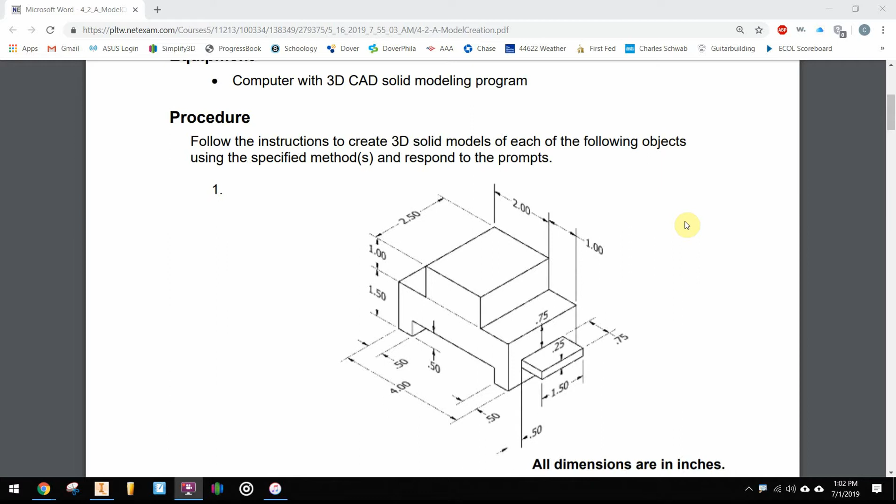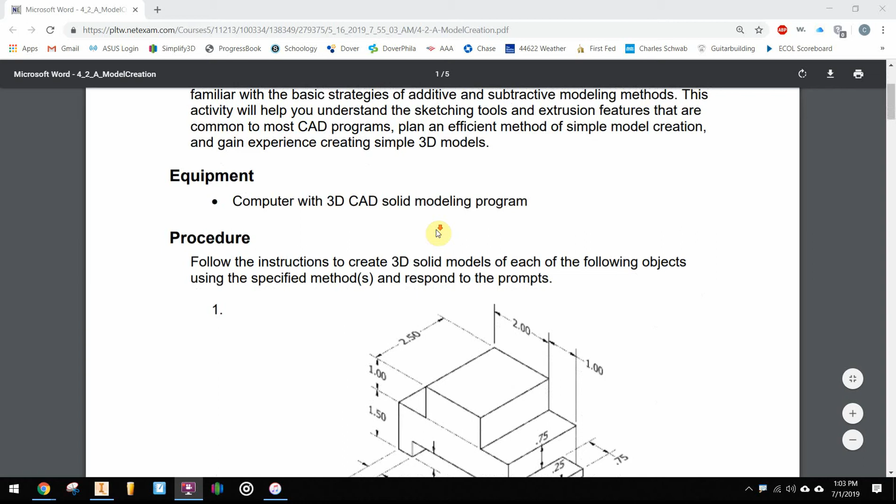The other parts we're supposed to build are what I call widgets. They have no purpose other than being practice parts. You'll often see similar parts in drafting books going back to the turn of the century. I have a book from my grandpa with all kinds of these shapes as standard parts that have been drawn for traditional drafting with straight edge, compass, and machine, all the way through now to computerized drawings. These are all from 4.2A, model creation. They're not very hard, so we'll quickly walk through these, using a combination of additive and subtractive modeling to model these parts.

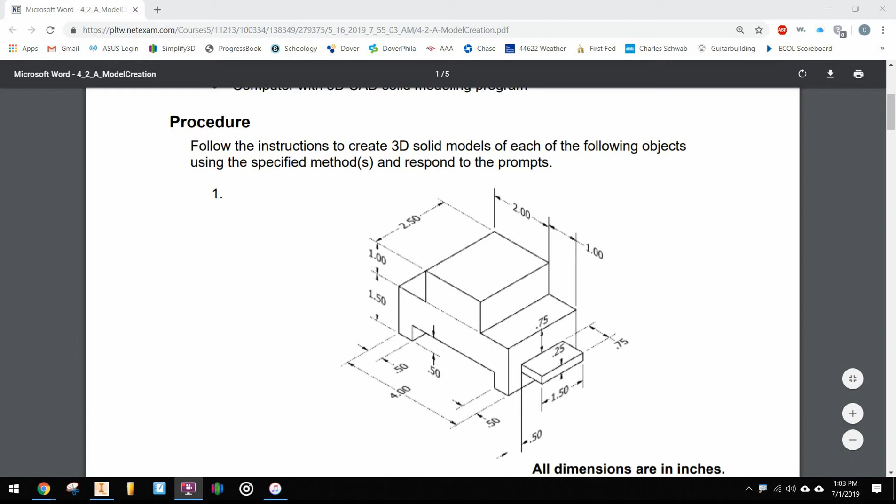Next I've got to start a new part, which I've already done. I'm going to make sure I save this, saving over my part from last year. I just called this widget number 1 from activity 4.2.

Let's start with a sketch on the XY plane using the rectangle tool, making sure I select the origin as my starting point. We have a total width of 4 inches by hitting the tab key, 4 inches by 2.5 inches tall.

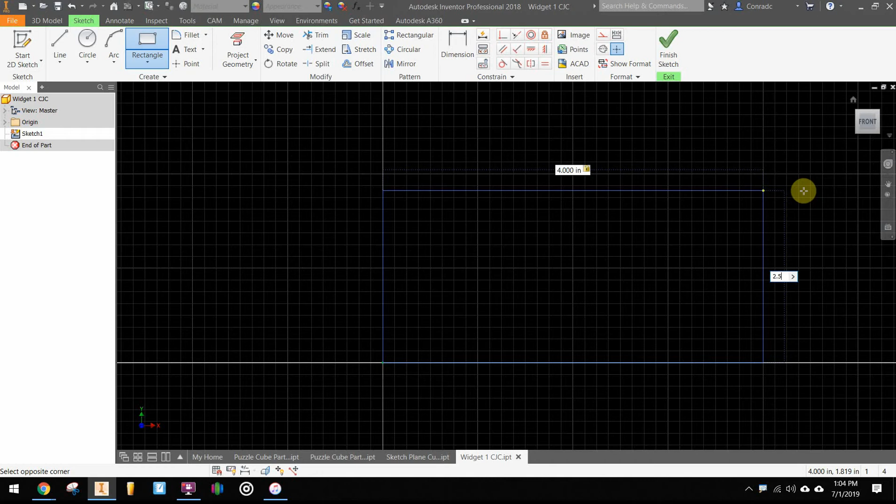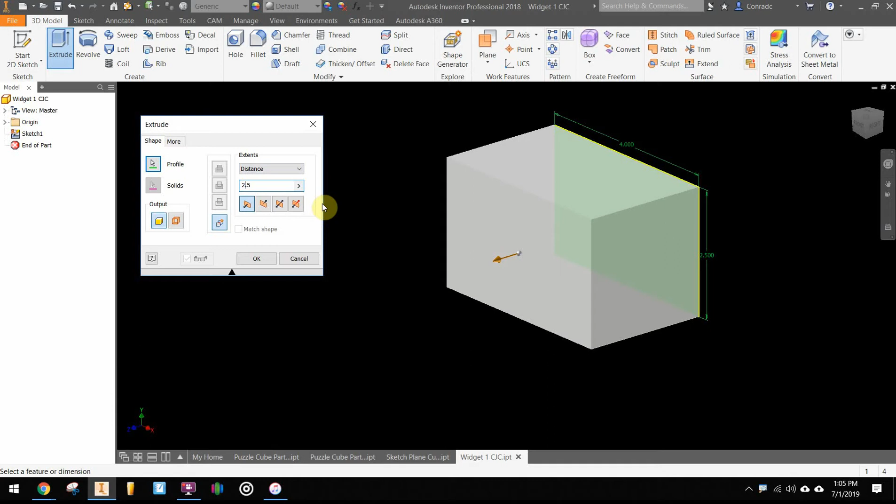We'll go ahead and extrude that a distance of 2.5 inches. And if you have to modify it - my keyboard probably needs new batteries - 2.5 inches there.

So there's the full part, if I was starting from a full block, minus the little tab that's kind of sitting on the side.

So then from that front face, I'm going to go ahead and draw a little square point, or it's actually 1 inch by 1 inch, so that has that square fully constrained. And then let's do another square, 1 inch by 1 inch. And then at the bottom, I'm going to eyeball a rectangle - I'd have to do some math, which Inventor likes math, but I don't want to do the math just yet.

So let's just tab and put in the 1/2 inch height. I'm going to dimension it exactly the way it is on the sheet. So there's a 1/2 inch height, and when I did that, it kind of flipped the rectangle to the bottom. That's no problem, it's not fully constrained yet, so I should be able to drag that around. And no, I can't.

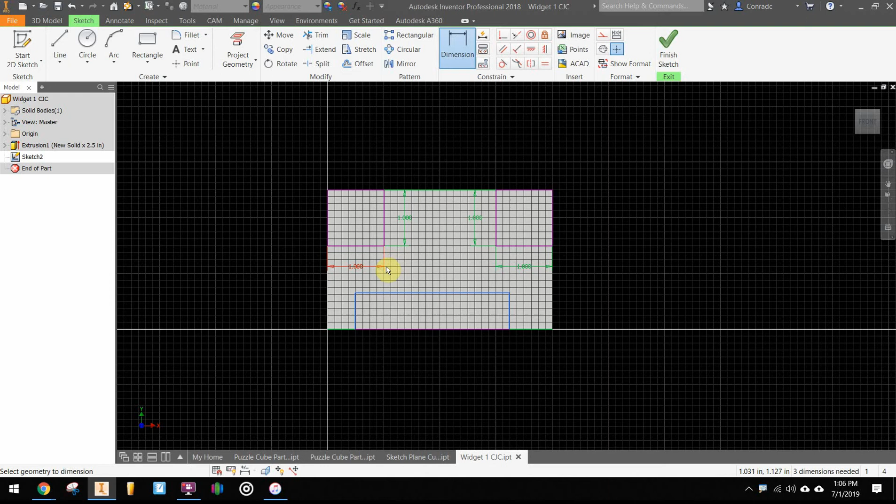So we're going to have to go backwards to go forwards then - sometimes that happens with Inventor. You can't break it, you can always fix things. So let's go ahead and delete that dimension. I'm going to drag this side back up then, and now we'll dimension exactly what we want. We want this side to be 1/2 inch, and we want the distance from each side to be 1/2 inch.

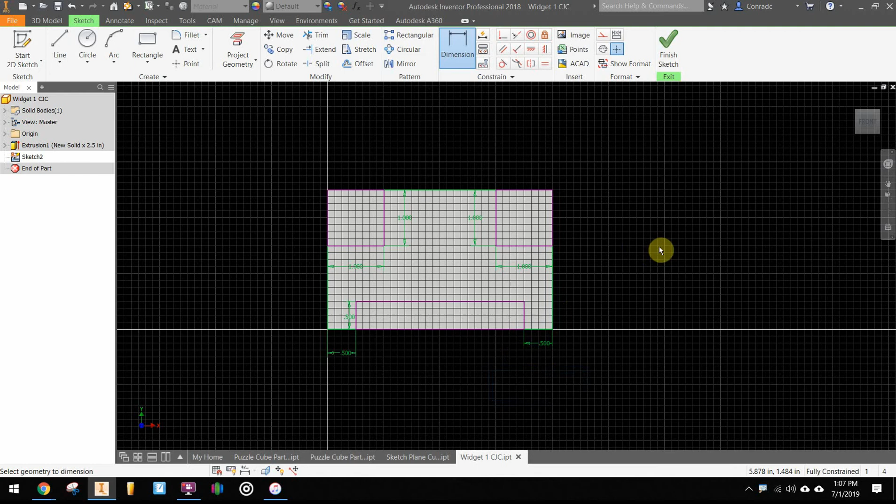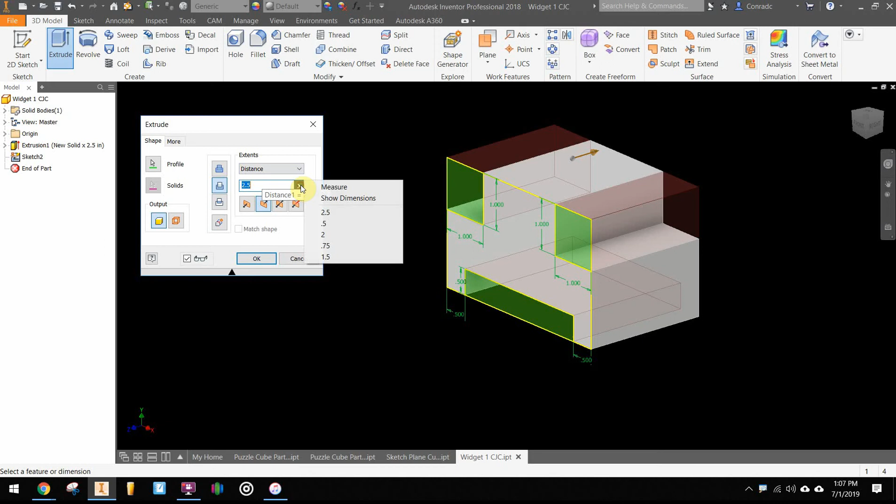This kind of looks like one of the little Space Invader dudes from the old Atari game, once we cut out those missing shapes. So I've got a drawing now fully constrained with 3 squares, or 2 squares and a rectangle at the bottom. When I go to extrude this, you'll notice I can select all 3 of those profiles to cut. And when you are cutting all the way through, best practice, depending upon your design intent, is probably to cut all. So we'll go ahead and say OK.

Now if you look back at the widget, I have most of it built. I just have to build that little tab on the side. Again, we'll dimension it the same way it's dimensioned on the drawing. I'll just start with a rectangle.

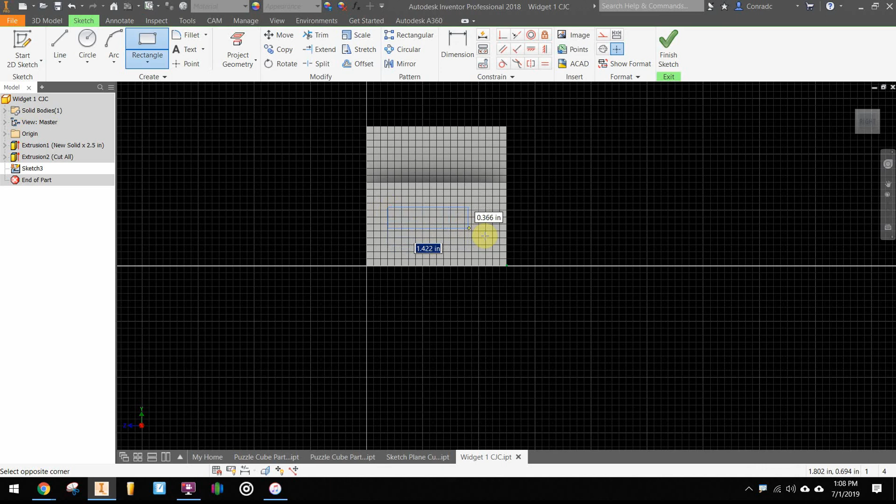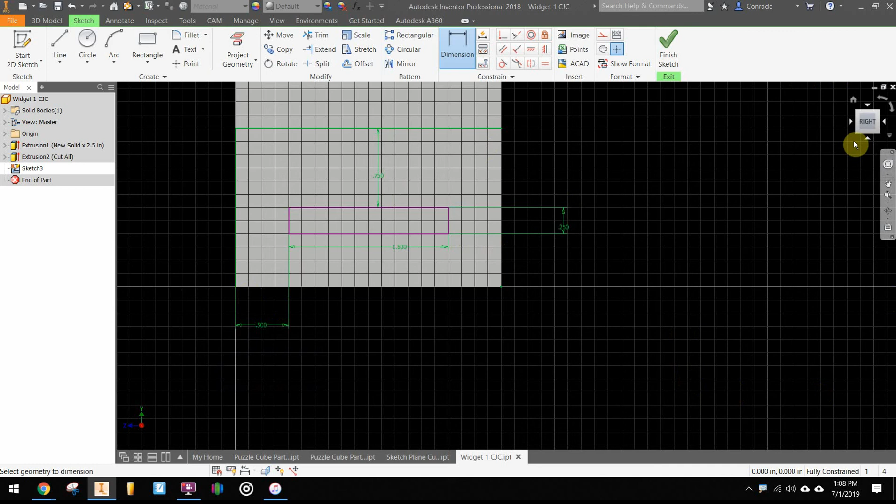And select the dimension tool. It is 0.75 from that top edge. The dimension itself, the sides, are 0.25, and it's 1.5 inches wide. They also show us that it's 1/2 inch from the front edge. So now I have a fully constrained rectangle and I'm ready to extrude.

So I'll select that profile and extrude it 0.75 inches. And there's my first widget.